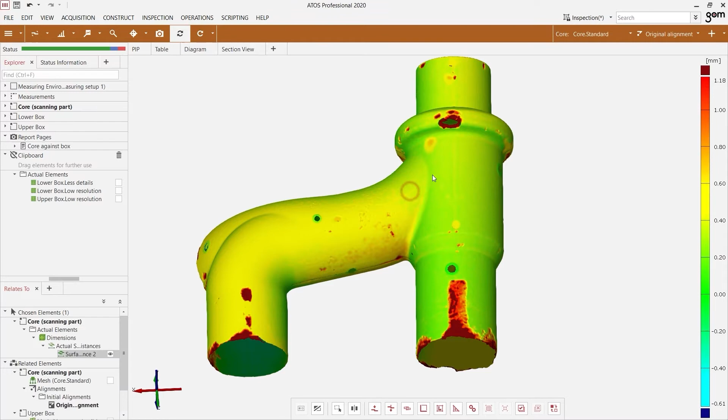Also the topic of digital assembly. The Software Suite 2020 will also provide greater support for digital assemblies. Past versions have used special scripts to execute gap and flush analysis to meet, for example, different manufacturers' standards.

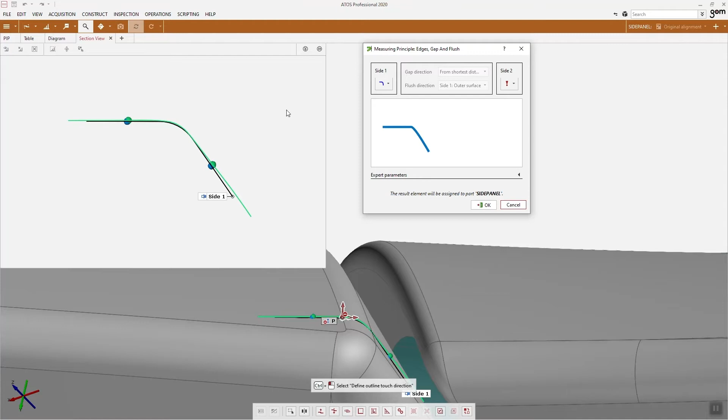We will use the data from these analyses to build a general solution. This will make it much easier for you to use the virtual master jig functionality to meet all automakers' requirements. Gone are the times when you had to fall back on countless scripts. The software now includes a functionality allowing you to comfortably perform these flush and gap analyses according to each automaker's standards.

Our Software Suite 2020 also boasts many enhancements for evaluations using PMI files or for general GD&T evaluations. We have improved some algorithms, added computations that had not been possible so far, such as datum systems on free-form surfaces, and enhanced visualizations significantly.

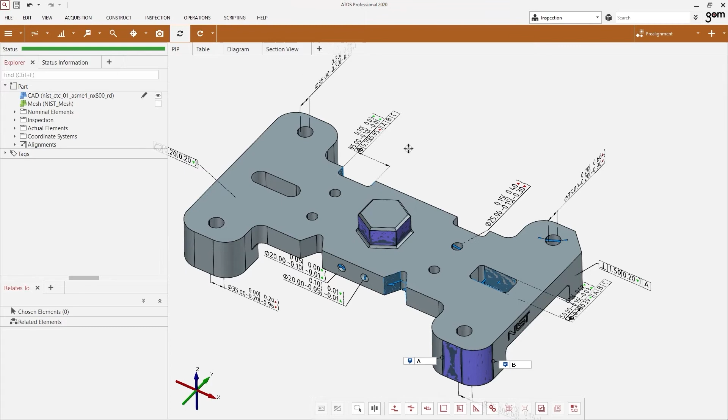We now support standardized ISO visualizations of labels. As in CAD software, you will now be able to position labels in 3D. The label content will also be displayed in line with ISO standards, which will allow you to create and report visualizations in our software identical to the drawings you originally received for measurement planning.

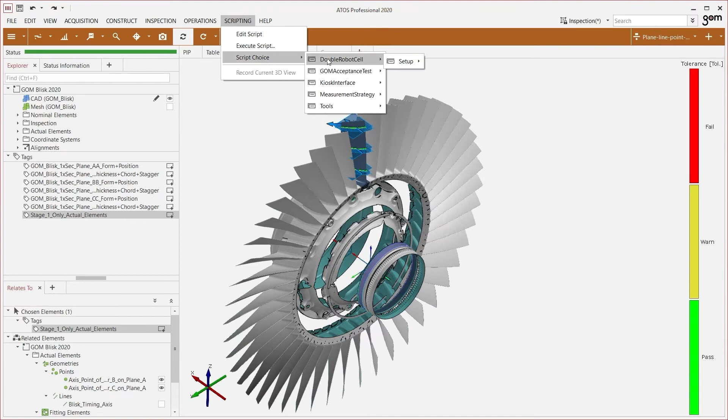When it comes to blade inspections, our Software 2020 has another highlight in store, namely blisk analyses - that is, ring segments comprising several rotor blades. Up to now, such evaluations have been relatively complex and elaborate. Now they are much easier. You define your evaluations for only one blade and then run them automatically for all blades, or select blades on the blisk.

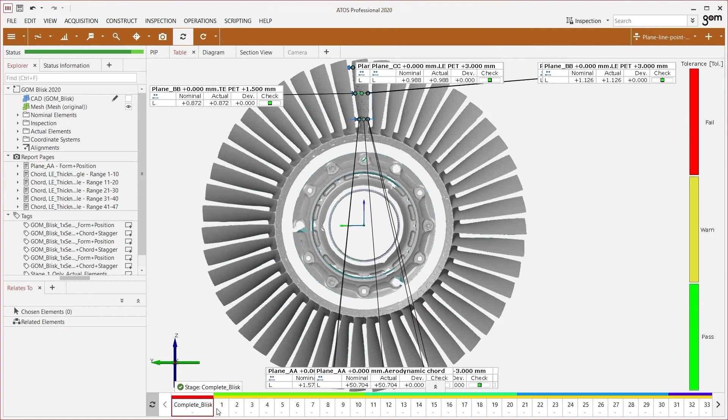Automatic position generation can prepare the measuring program so that you can scan the blades or the blisk in their entirety and run a simplified evaluation afterwards. This saves you a lot of manual input. Instead of having to create hundreds of evaluation elements manually, the software will execute this task.

Another focus of the 2020 software release will be CT volume data inspections.

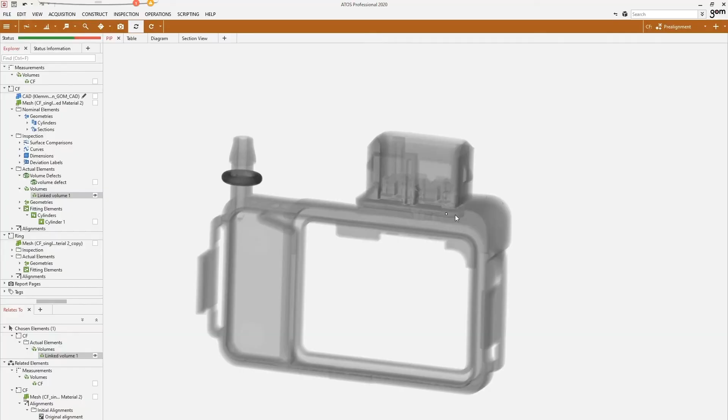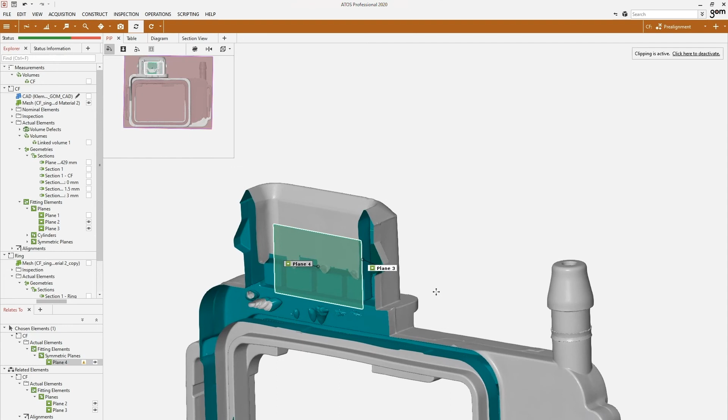It now includes a volume renderer where you can view the tomographic planes straight away without having to polygonize and evaluate the scanned CT data beforehand. You will be able to work directly on the volume data. The software will feature very extensive clipping functionalities where you can comfortably view even internal structures from different perspectives, with the usual good user experience of our software.

Another highlight: the new shrinkage cavity analysis functionality for CT evaluations.

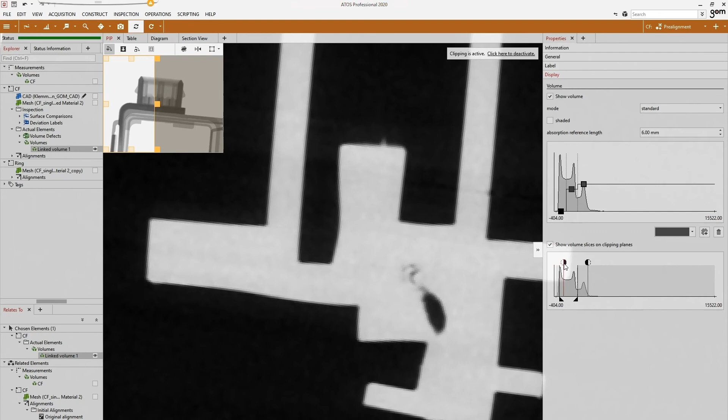With this novel element, you can classify, evaluate, sort, and locate subsurface component defects with relative ease, ensuring that you can execute your customer's use cases. Which defects are too close to the surface? Which defects have an oversized volume and will cause the part to be outside the tolerance range?

Our GOM Software Suite 2020 also includes several virtual clamping improvements. We already demonstrated with our Software 2019 that we can achieve significantly higher repeatability with virtual clamping - that is, measuring parts in free state - compared to clamping and measuring parts in physical fixtures.

Naturally, we've expanded our software functionalities after this success.

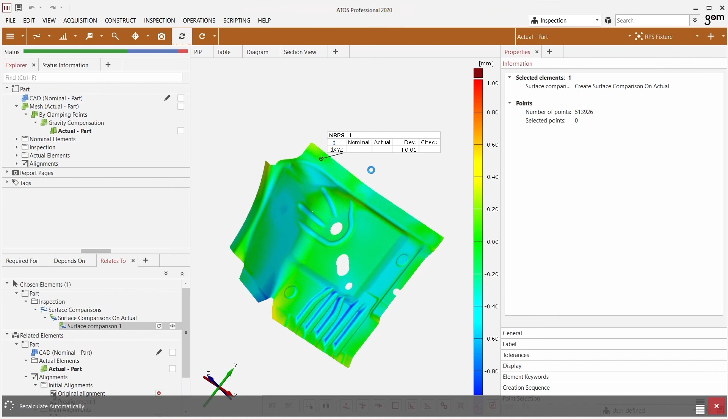One of the new features is an improved mesh interpolation so as to minimize artifacts that occur in rare cases. Switching between different clamped states is another enhancement our customers had requested. You will also be able to see the state of the mesh without gravity compensation and to depict its different states on a report page for comparison purposes.